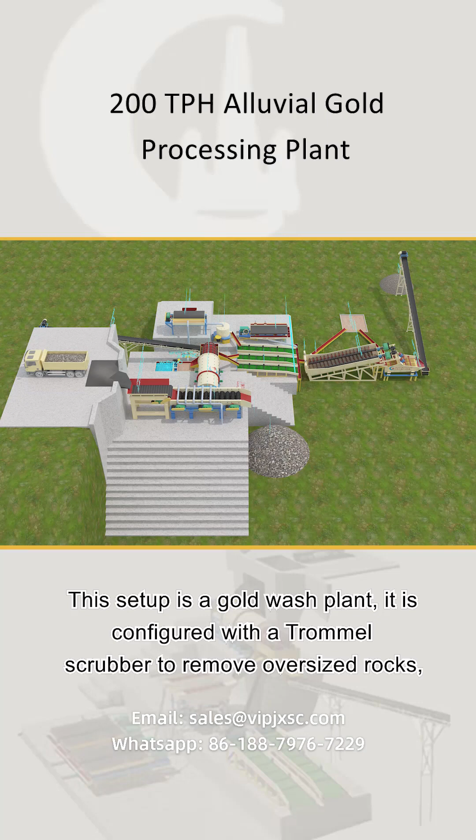This setup is a gold wash plant. It is configured with a trommel scrubber to remove oversized rocks, a wet drum magnetic separator to remove black sand, and a centrifugal concentrator, shaking table, and sluice box to capture fine gold concentrates and gold nuggets.

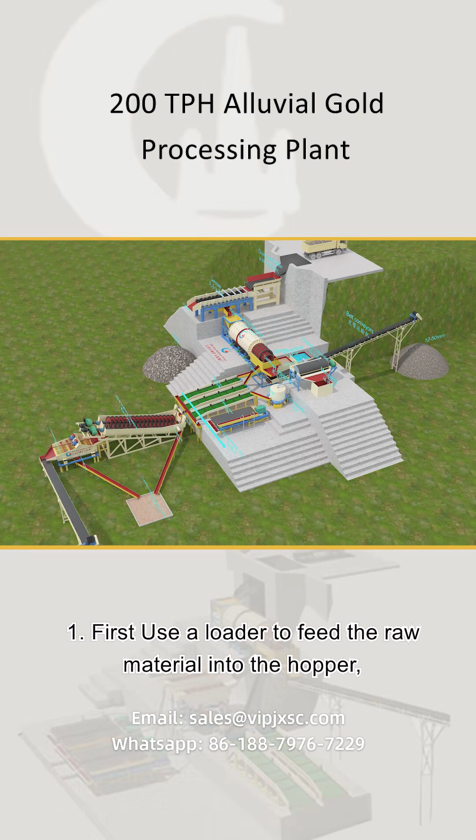First, use a loader to feed the raw material into the hopper. The stone enters the vibrating feeder from the lower part of the hopper. The plus 50 mm scrap will be separated by the vibrating feeder grizzly bar and transferred by a conveyor to a waste pile.

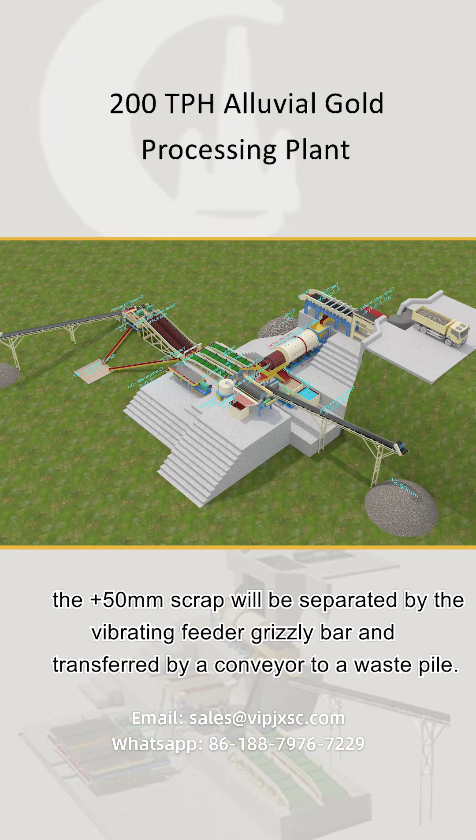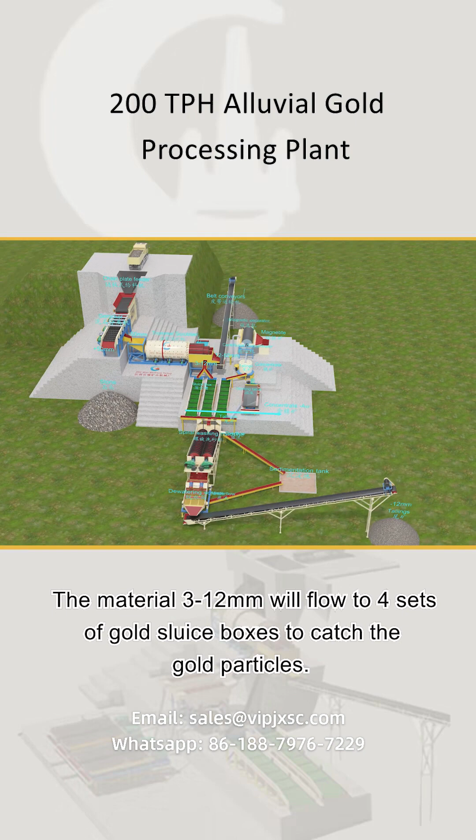Material 0 to 50 mm will feed to the trommel scrubber. We made 2 screens on the trommel scrubber, 3 mm and 12 mm respectively. After washing and screening, the material 12 to 50 mm is transported as waste sand by belt conveyor. The material 3 to 12 mm will flow to 4 sets of gold sluice boxes to catch the gold particles.

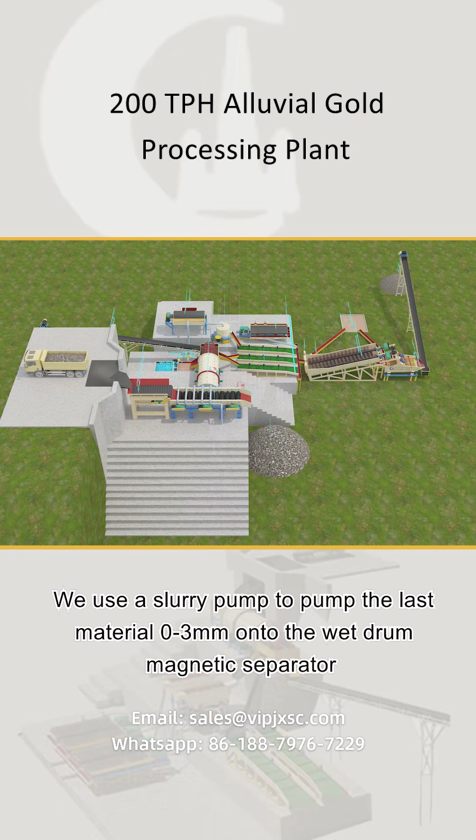Then the material between 0 to 3 mm will be input into the slurry tank. We use a slurry pump to pump this material 0 to 3 mm onto the wet drum magnetic separator to remove black sand, magnetite.

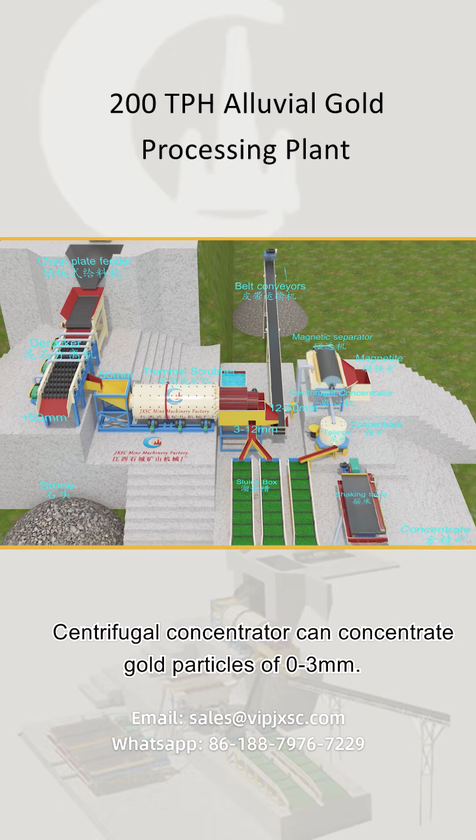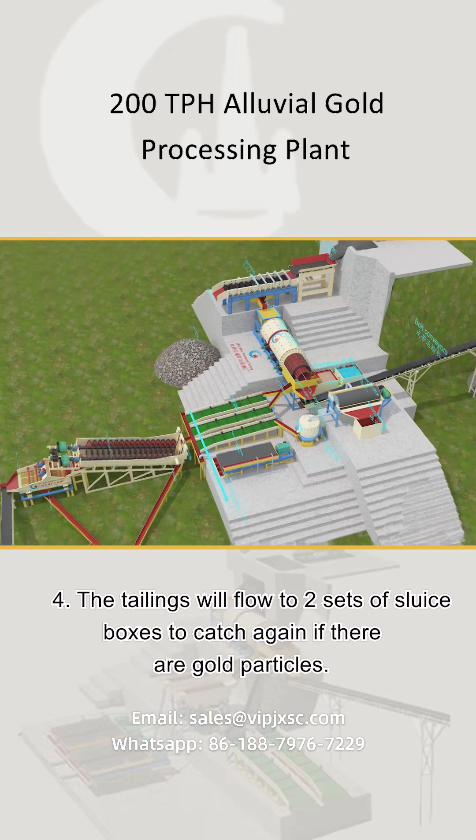After removing magnetite, the tailings will feed to the centrifugal concentrator, which can concentrate gold particles of 0 to 3 mm. The tailings will then flow to 2 sets of sluice boxes to catch again if there are gold particles.

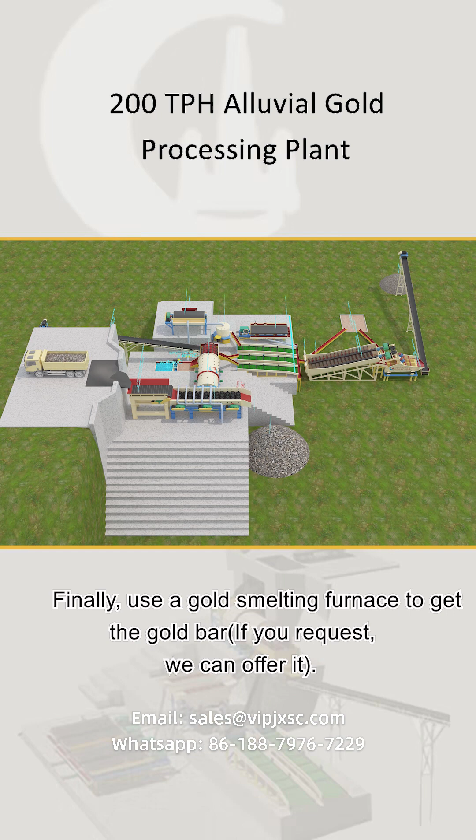The concentrate after the centrifugal concentrator enters the shaking table through the pipe. The shaking table can concentrate the gold powder between 0 to 2 mm. Finally, use a gold smelting furnace to get the gold bar. If you request, we can offer it.

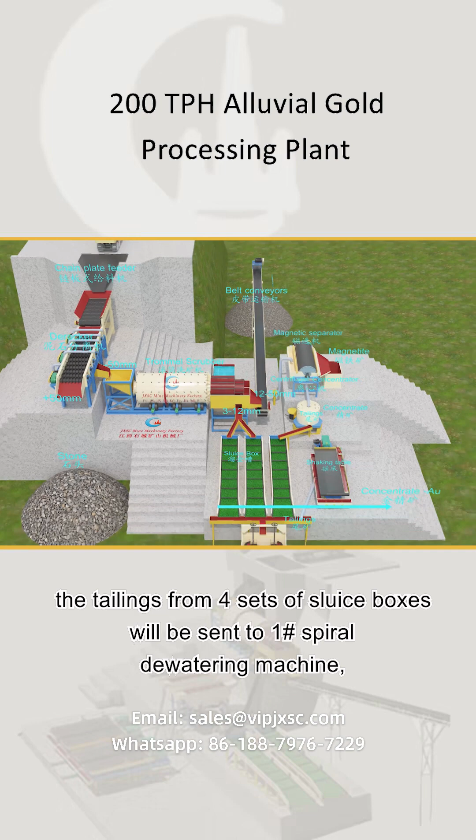After getting all the gold concentrates, the tailings from the 4 sets of sluice boxes will be sent to spiral dewatering machine number one, then using a belt conveyor the 3 to 12 mm tailing dry sand is discharged. The overflow clear water can be used again on the trommel scrubber or sluice box, and will flow to the sedimentation tank.

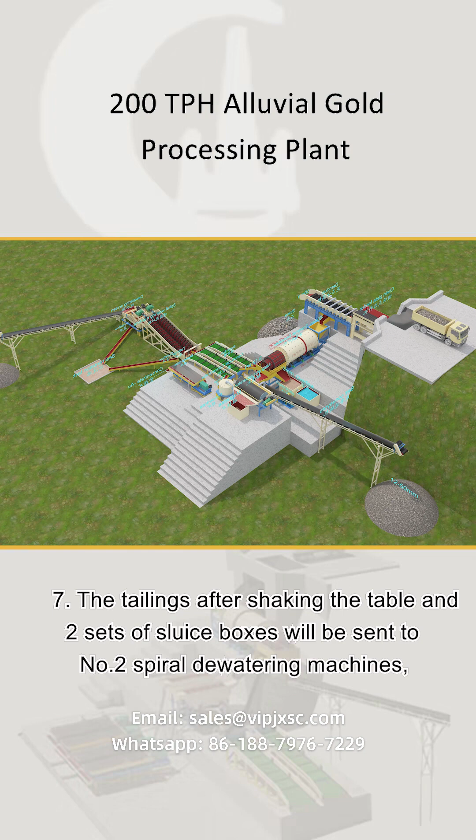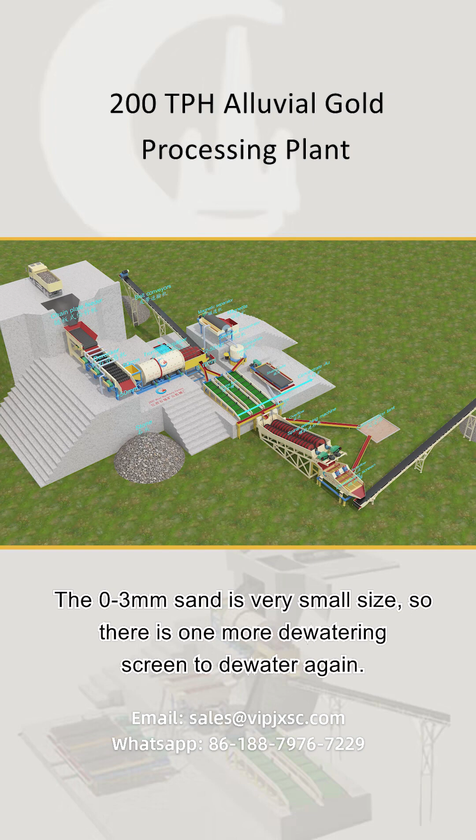The tailings after the shaking table and 2 sets of sluice boxes will be sent to spiral dewatering machine number two. The overflow clear water will flow to the sedimentation tank. Since the 0 to 3 mm sand is very small in size, there is one more dewatering screen to dewater again. Finally, use one belt conveyor to send out the 0 to 3 mm tailing dry sand.

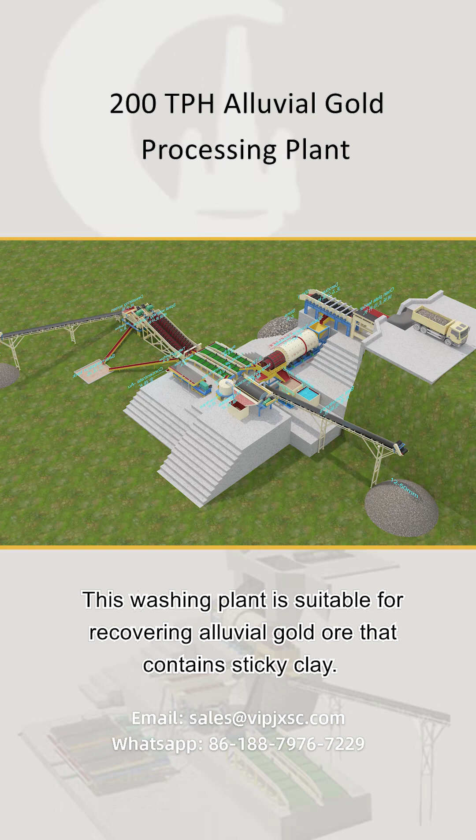The trommel scrubber, centrifugal concentrator, and shaking table can change to different models and increase in quantity according to different capacities. This washing plant is suitable for recovering alluvial gold ore that contains sticky clay.